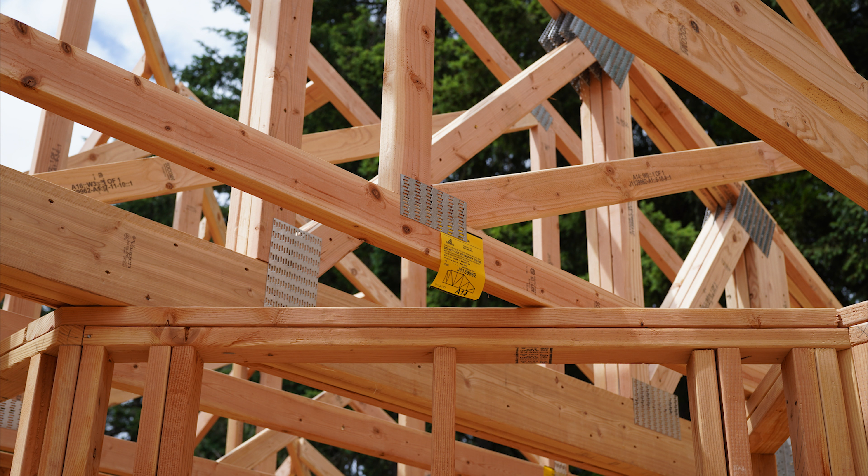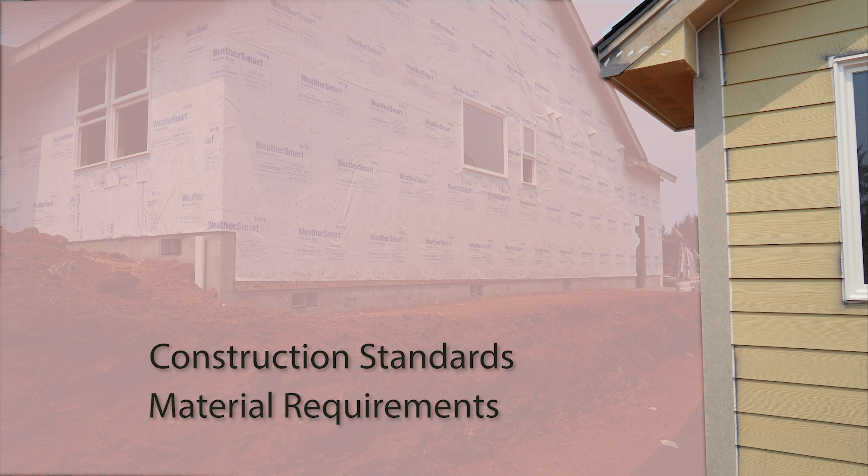This training has been prepared for residential contractors licensed by Oregon's Construction Contractors Board. This training video covers construction standards and material compliance requirements from the latest iteration of the Oregon Residential Specialty Code, the 2023 ORSC, regarding wildfire hazard mitigation or home hardening.

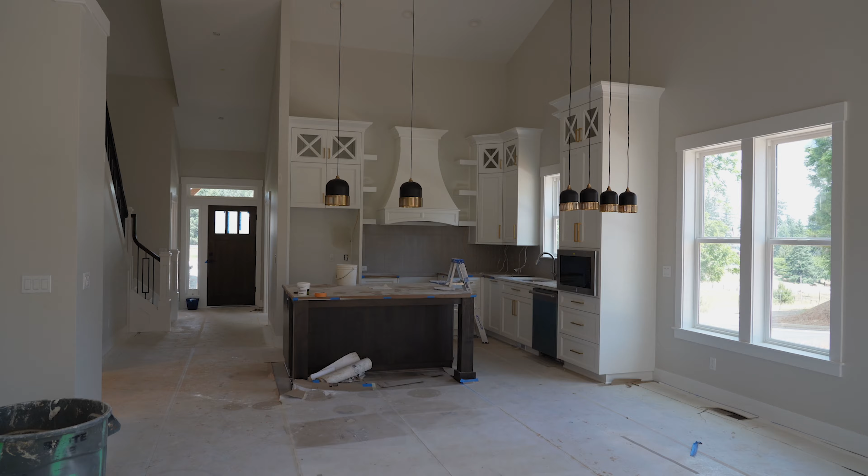The objective for this training is to identify the appropriate construction standards required in areas of our state where the wildfire hazard mitigation provisions of the 2023 ORSC are applicable.

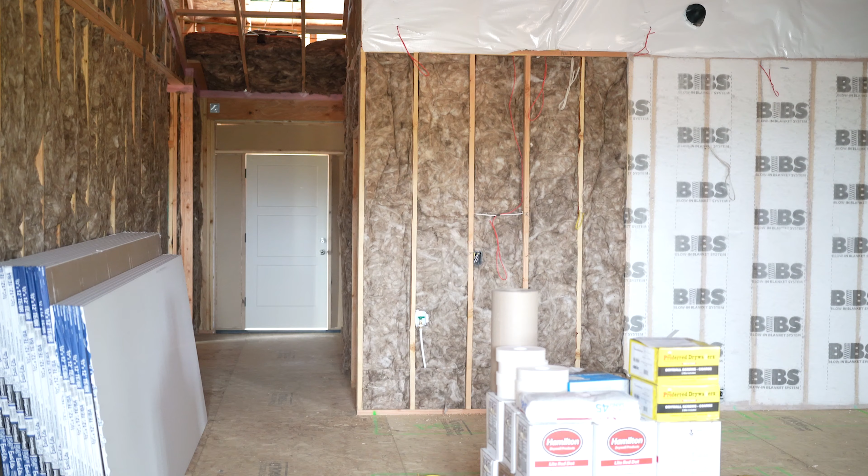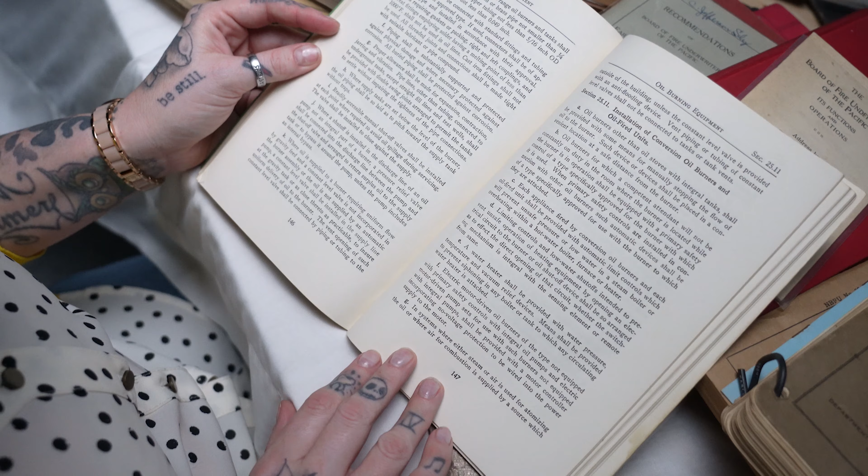Tony Rocco has worked in the industry for over 20 years and has been the structural program chief since 2017. Tony has a personal library of national and state codes dating back to the early 1900s, and believes that the original history and true genesis of modern code provisions is critical to the improvement of Oregon specialty codes for local government partners, customers, and all stakeholders. He is a great resource for questions about ORSC and OSSC matters.

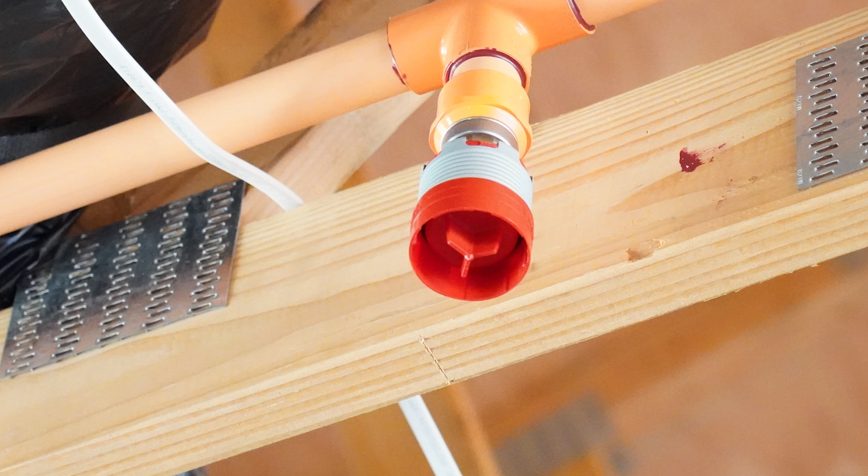Eric McMullen has a wealth of code experience from an extensive 27-year fire service career. He started working with fire and building codes in the early 1990s at the Oregon Office of State Fire Marshal. Eric is a great resource for all things fire life safety and is our resident fire systems expert.

Section R327 of the Residential Code has been around for 20 years. In 2019, it was expanded to include a much broader range of wildfire hazard mitigation standards. These provisions are often referred to as home hardening or fire hardening and are intended to help prevent ignition of a home during a wildfire event, most often via airborne embers.

These provisions apply generally to all dwellings and their accessory buildings in areas where a local municipality has implemented the provisions via local ordinance.

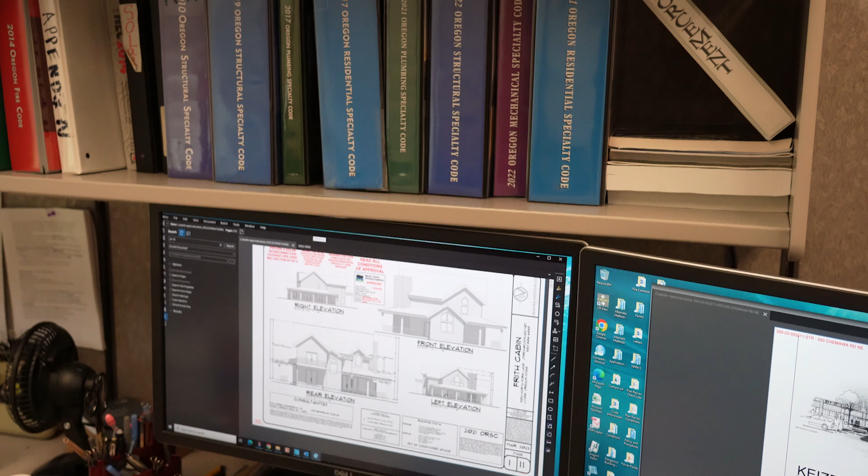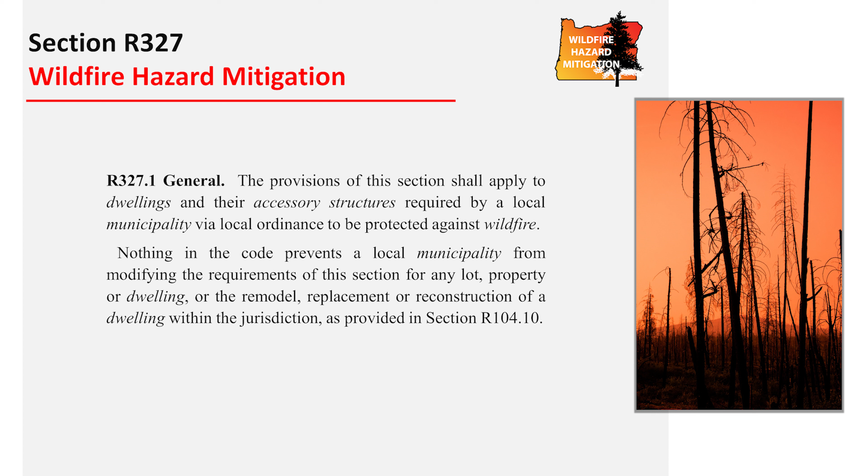Currently, the standards are available for all municipalities in the state to adopt and only apply to those areas within the county or city that are detailed in the adopting ordinance and identified on the locally required map. Local building officials, of course, retain the flexibility to modify the requirements for any particular lot, property, or dwelling, remodel, or reconstruction activity based on the site details.

As we covered on the previous slide, Section R327 is available for any municipality to voluntarily adopt, without going through the local amendment process detailed by statute and rule. Where adopted locally, the ordinance must outline the areas where the provisions apply, a local plan to address any subdivisions already under construction, and a local appeal mechanism for customers to challenge the additional requirements.

Some municipalities already have existing ordinances in place adopting these standards. After the expansion of the section in 2019, the cities of Medford and Ashland adopted the section. Other municipalities, such as Deschutes County, have long standing partial ordinances requiring compliant roof coverings and prohibiting wood shingles or shakes.

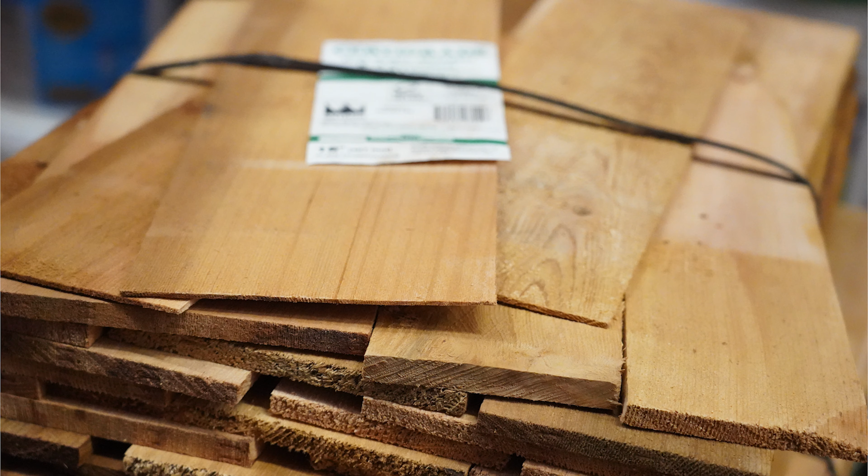All existing ordinances are recognized and permitted to continue without change as determined legally sufficient by the municipality.

To determine if the standards apply in the area where you are working, we recommend you contact the local building department experts directly. On a very important side note, our Oregon legislature has established a comprehensive statewide policy regarding future application of these wildfire mitigation construction standards. While currently Section R327 is an optional set of requirements for local governments to consider implementing, along with establishing a local wildfire hazard zone map, in the near future, a statewide wildfire risk map will be implemented by the Department of Forestry with extensive support from Oregon State University.

Once that statewide map is effective, through the Oregon Explorer online mapping database, it will supersede all locally adopted maps and will identify all areas of the state where these construction standards of Section R327 will apply outright. At that time, these provisions will no longer be optional for local government, but will become automatically applicable to all areas identified on the map as elevated wildfire hazard zones.

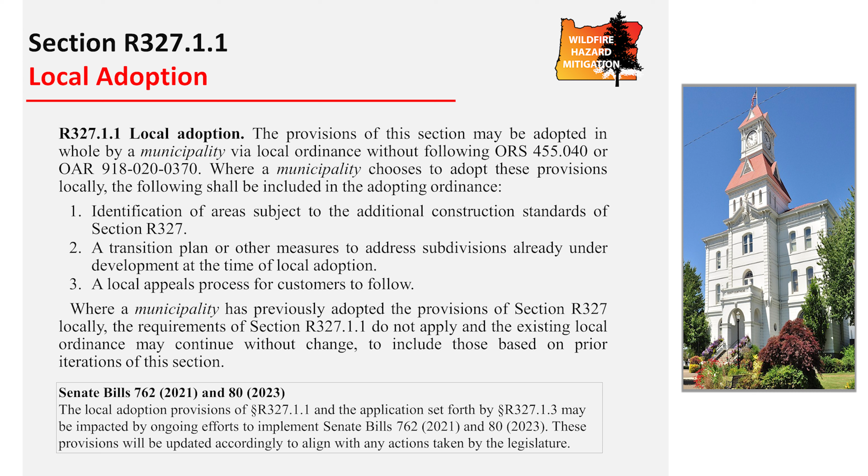Until then, these provisions remain optional for local government. When the forthcoming statewide policy is implemented, interim amendments to the residential code will be adopted through our public rulemaking and public advisory board meeting processes. If you're signed up for division notifications, you will receive ample notification of these meetings.

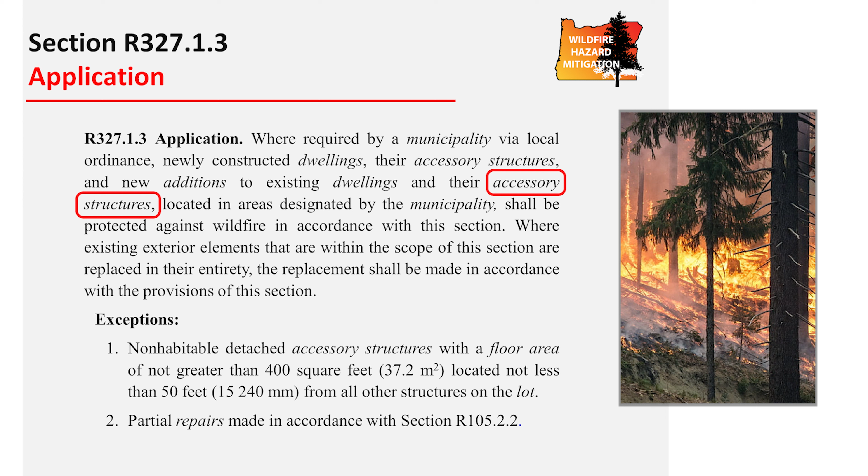Where adopted locally, all of the following require compliance with the provisions of the section unless specifically exempted elsewhere by the section: new dwellings, new accessory buildings like detached garages, sheds, and shops, new additions to existing dwellings that increase the overall area of the dwelling, new additions to existing accessory structures where applicable, and full replacement of existing exterior elements covered by the section.

This only applies where that element is replaced in its entirety. For example, if the existing dwelling is entirely re-roofed, the new roof covering would be required to meet the standards of this section. However, if an existing roof is simply patched or repaired, which only impacts a segment of the existing roof covering, the standards would not apply.

Additionally, non-habitable accessory structures are exempt where they are detached, not greater than 400 square feet in usable floor area, and a minimum of 50 feet away from any other structure on the lot. Where the accessory structure is less than 50 feet from any other structure on the lot, it must comply with the standards regardless of the size or area.

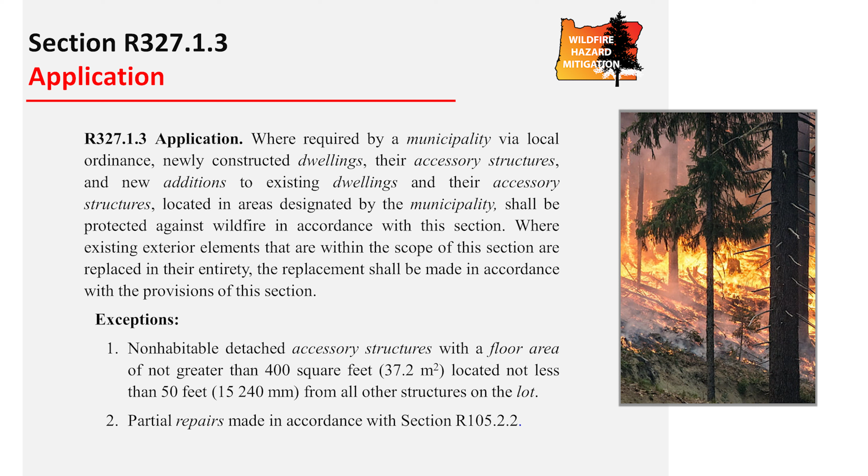Later in the presentation, Eric will cover each of the exterior elements in more detail to help identify options for compliance.

As we covered on the last slide, the hazard mitigation standards apply to the full replacement of exterior elements which are covered by Section R327. This overlaps with existing permit exemptions identified in Chapter 1, Section R105.2. Some exterior elements, such as windows which are required to be fire resistance rated, and roof coverings of re-roofing activities located in areas designated by the municipality as wildfire hazard zones, do require appropriate building permits through the local building department.

However, other items such as small accessory structures like tool sheds, garages, or carports, and activities such as re-siding of an existing dwelling remain exempt from building permits even in the areas where Section R327 has been voluntarily adopted.

The overarching guidance of Chapter 1 permit exemptions is that the allowances to be exempt from a local building permit do not allow any work to be conducted without meeting the applicable code standards for the items being exempted. More plainly, even if the activity is exempt, the code still requires that the work conducted meet the applicable provisions, and in this case, that the exempt item still complies with the wildfire hazard mitigation construction standards.

We're now moving into the technical provisions of the section. We'll start out by covering several definitions for additional context regarding the code's expectation of compliant materials. Further along in the presentation, Eric will provide all the details you will need regarding the technical application of these definitions. The first definition we have is heavy timber.

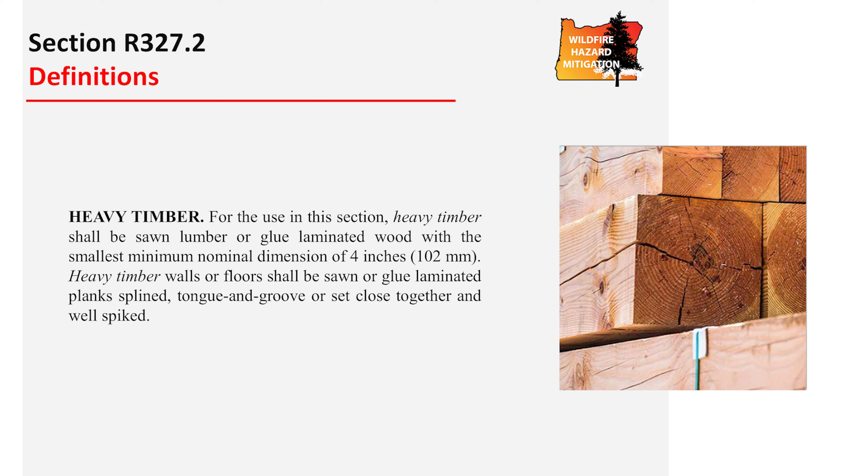Code uses this term to describe materials which are either solid sawn or glulam wood, and of not less than 4 inches nominal in any dimension. When considering standard lumber packages, this means we must minimally have a 4x4 member to constitute heavy timber. Keep this in mind, particularly for porch cover construction, other projections, walking surfaces such as decks, and for any location where the term is used in the section.

Next, we have ignition-resistant material. This very technical definition describes building materials which resist ignition or sustained flame exposure to a level needed to reduce assumed loss or damage from wildfires under the worst-case conditions and assumed exposure to burning embers and small flames.

To comply as ignition resistant, the exterior building material must be tested in accordance with ASTM E84 or UL 723 and demonstrate the following characteristics: a flame spread index of 25 or less when exposed to the 30-minute test, and show no evidence of significant combustion by limiting the flame front of the test flame to not more than 10.5 feet beyond the center line of the burner at any time during the 30 minutes.

So how do you know if a material is ignition resistant? Look at the cut sheets. The manufacturers of these materials want to advertise their durability and properties as well as testing results. Using the manufacturer's technical data sheets is the best way to quickly identify material compliance or non-compliance. If you have a question about a particular product, we recommend contacting the manufacturer directly before purchasing the product.

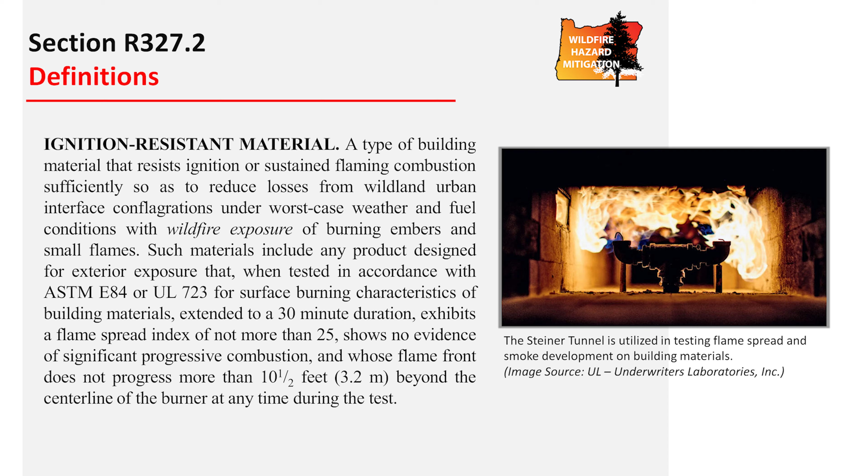For our last technical definition, we have the highest level of wildfire-resistant building materials: non-combustible materials. This gold standard material property is reserved for building materials in their actual installation form, which will not ignite, burn, support flame propagation or combustion, and will not release flammable vapors when subjected to fire or heat. The applicable testing standard in this case is ASTM E136, and the testing protocol includes exposing the material to heat and flame upwards of 1382 degrees Fahrenheit for not less than 30 minutes.

So what non-combustible materials come to mind when you hear the term and review the definition here?

Commonly, hard metals like steel and masonry, including both CMU or concrete masonry units and traditional clay brick, are qualified. Other materials include concrete, certain glass, and even some synthetic proprietary composites. When in doubt about the material testing, qualifications, properties, and related details, we recommend relying on manufacturer data and standardized material details for things like steel members and masonry piecework.

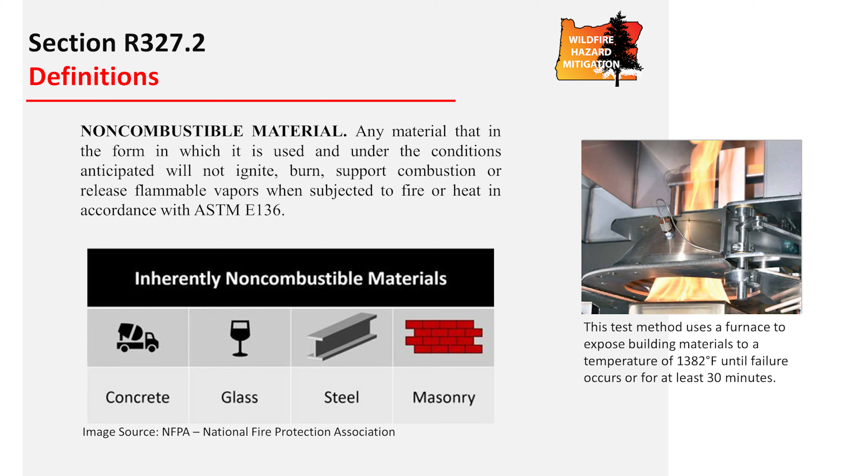Now that we have gone through the administrative foundation of the wildfire hazard mitigation provisions of Section R327, and reviewed a few critical technical definitions, it's time to dig into the technical installation requirements along with senior building code specialist and vastly experienced fire service representative, Eric McMullen. Take it away, Eric.

Now that Tony's walked you through the scoping, provisions, and definitions, we'll move on to the material specific requirements. The first requirement is roofing in R327.3. The minimum requirement for roofing is a Class B roof assembly. There's quite a few different materials that can get you there: tile, clay, concrete, metal. Most architectural asphalt shingles will give you a Class B rating. The key is you just want to check with the manufacturer and make sure that the appropriate rating applies to the material you're installing. Wood shingles and shake roofs are not permitted at all, even if they're fire retardant treated.

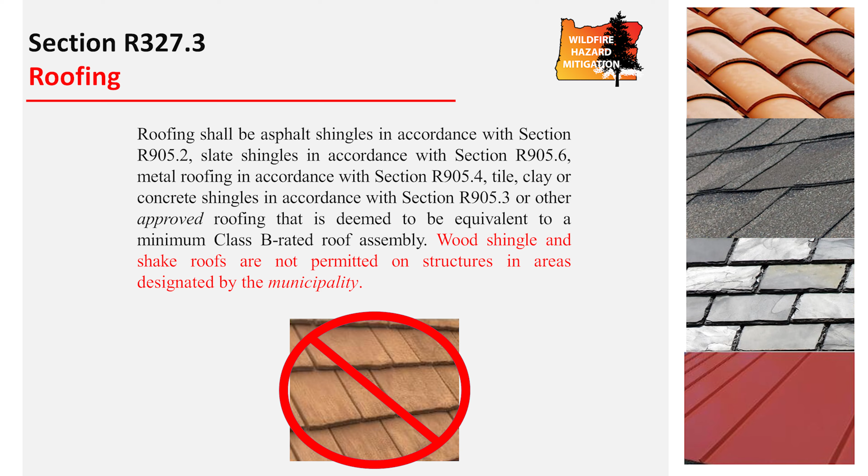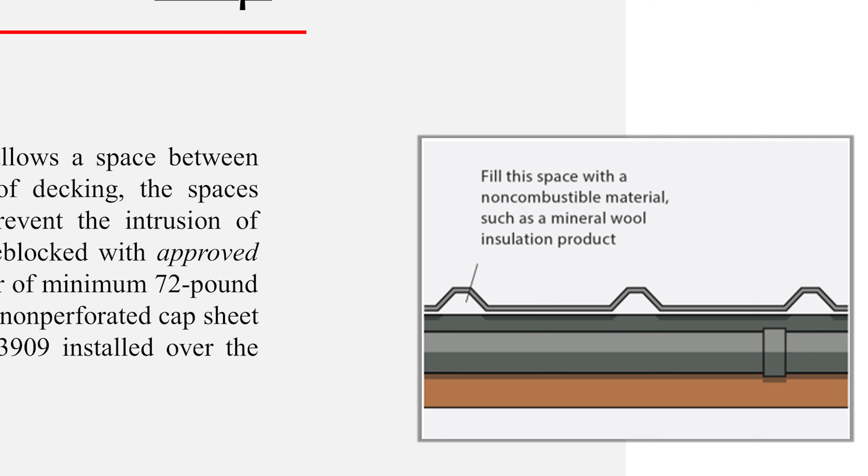And for metal and tile, there's one other thing we need to address. When it comes to metal or clay tile roofs that leave gaps like you see in this illustration, the requirement is to mitigate those gaps with one of three options. The first option is that the material is constructed such that it prevents the intrusion of flame and embers. The second option is to fill those voids with an approved fire blocking material.

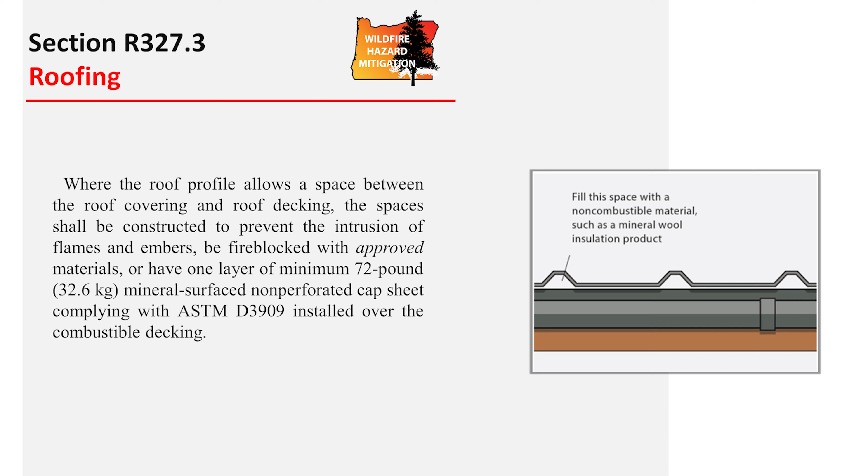Note that approved is italicized, so that means it's defined. The approved fire blocking materials can be found in this code in section R302.11.1. The last option is to put down a layer of 72-pound mineral surfaced non-perforated cap sheet under the roofing material on top of the roof deck.

When it comes to valleys, if valley flashing is installed, then some additional treatment is required. For laced valleys with asphalt shingles, of course, this wouldn't apply. But when valley flashing is installed, it has to be a minimum of 26 gauge corrosion resistant galvanized metal, and that metal has to be laid over a minimum 72-pound mineral surfaced non-perforated cap sheet, not less than 36 inches wide all the way from the bottom to the top of the valley.

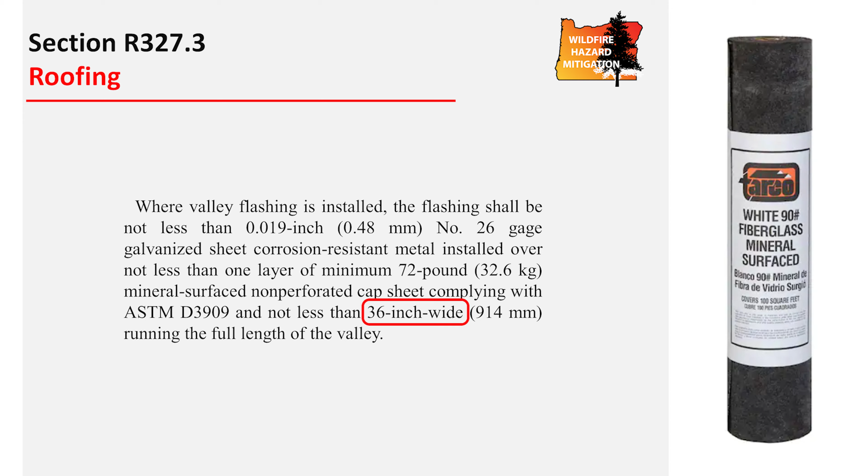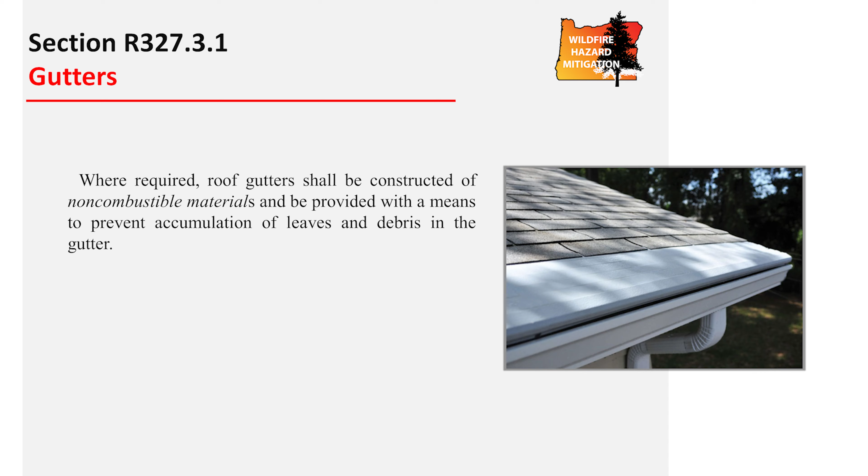The final topic under the roofing category is gutters. Gutters aren't always required in every jurisdiction, but where they are required, they will need to be non-combustible materials, and they'll need to be provided with a means to prevent accumulation of leaves and debris in the gutter. The code is not specific about the type of method for preventing the leaves and debris, but that methodology would also have to be non-combustible.

The next subject matter in section R327.3.2 is ventilation. The ventilation provisions cover all types of ventilation on a house, so roof ventilation, gable-end ventilation, and even crawl space ventilation, any of those vents. There are three options for how to deal with those vents, the first of which is to cover them with a non-combustible, corrosion-resistant wire mesh. That wire mesh has to be a minimum of 1/16 inch and a maximum of 1/8 inch in any dimension.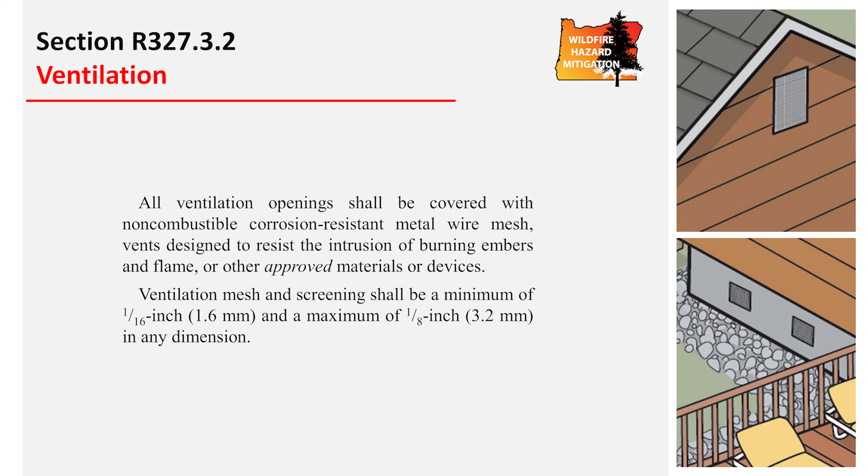The other option is to provide vents that are designed to resist intrusion of burning embers and flame, and these are special vents. We'll talk a little bit more about those on the next slide. And the last option is some other approved material or device. You'll note that approved is italicized, and again, just a reminder that means that term is defined. The definition of approved is as approved by the building official, so that would mean some other material or device that the building official deems equivalent.

Still under the subject of ventilation, now we get to the topic of ventilation specific to eaves, soffits, and cornices. In the previous slide, we gave you three options for how to deal with vents, generally crawl spaces, gable ends, roofs. This is specific to just eaves, soffits, and cornices. The base requirement is that there are no ventilation openings allowed in these areas, with a couple of exceptions.

The first exception is vents that are designed to resist the intrusion of flame and burning embers. There's a couple examples on the right here, made by Vulcan. The top is a soffit vent and the bottom is a foundation type vent. So these are examples of the vents that would fit that exception.

The second exception is that you can use any of the methods on the previous slide, so non-combustible mesh vents like on the right, or other approved method by the building official, as long as the eave, soffit, or cornice is at least 12 feet or greater above grade. So this would apply for most second story applications.

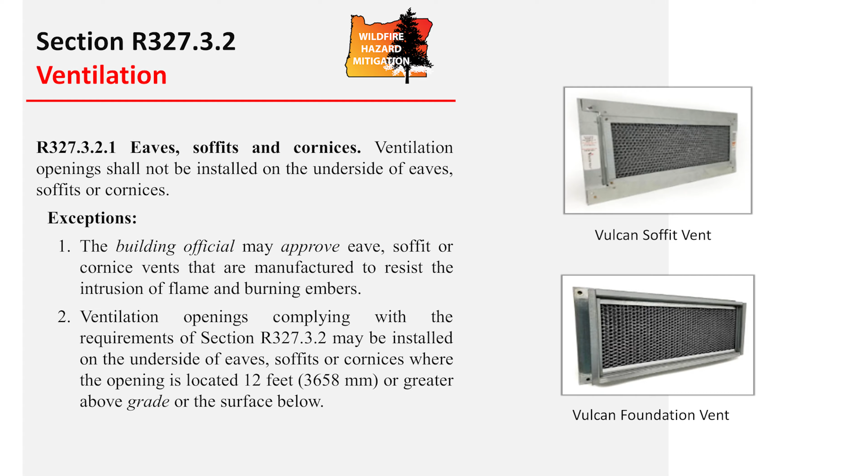The next subject matter we come to is exterior walls in section R327.3.3. The first part of this provision lays out the 5 different options for exterior wall coverings or wall assemblies. Those are different in terms of exterior wall covering just literally being the covering on the outside of the wall, and the assembly being the entirety of the wall. So you see the 5 items here, and you're going to see these items repeated as we go forward on a lot of the other different materials.

These are the items that Tony went over under the definitions section. Your requirement for exterior walls are non-combustible material, so that's things like metal, fiber cement siding complies, which is pretty common. Ignition resistant materials, and those are those that undergo the test that Tony would have talked about under the definitions. Heavy timber, again defined, and log wall construction or assembly, and that's kind of self-evident. And then the last one is kind of a catch-all, a condition of acceptance, and we're going to cover that in more detail in a little bit, but that's an actual testing of an assembly. So somebody puts together an assembly and has it tested specifically, and if it passes, then it would be approved.

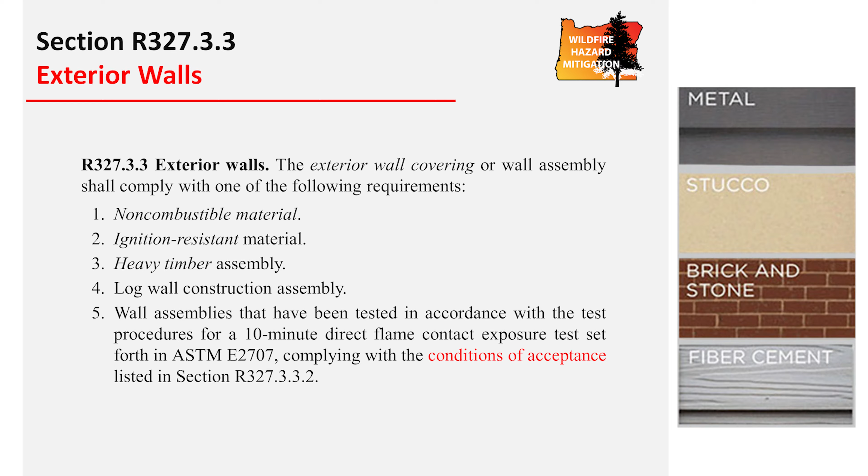Still under the subject of exterior walls, we have a couple of exceptions to the previous provisions we just discussed. Under these exceptions, there's 2 options that are considered deemed to comply. The first option is placing 1 layer of 5/8 inch Type X exterior gypsum sheathing behind the wall covering. So you could do a wood T111 and put the 5/8 Type X gyp behind it, and that would work. The other option is the exterior portion of a 1-hour fire resistant rated exterior wall.

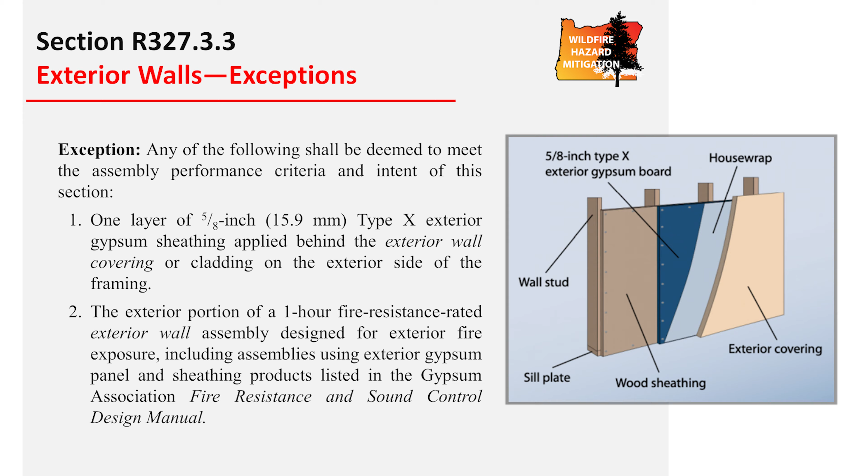Rated exterior walls are probably more common in commercial applications, or when you get too close to a property line in a residential application. So you can do the exterior side of that assembly from the fire resistance and sound control design manual, or the gyp manual.

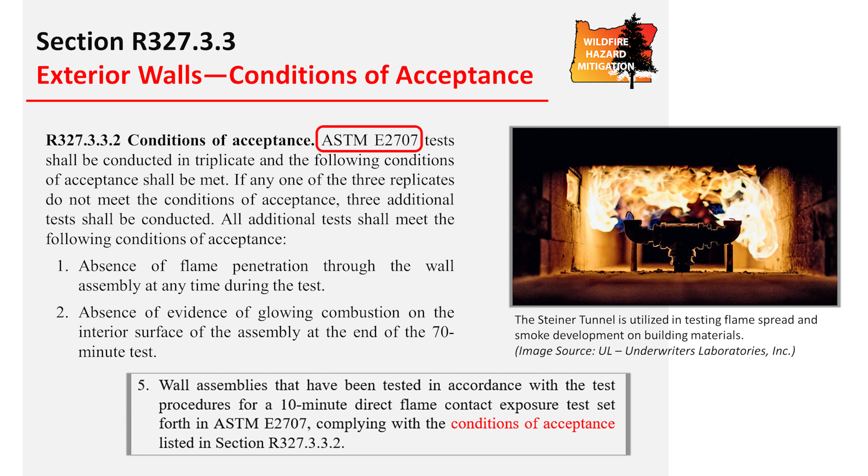Still under exterior walls, we get to the conditions of acceptance. So when we were talking about exterior walls and looking at the 5 options, remember option number 5 was a specific wall assembly that's tested. The language in R327.3.3.2 tells you what that conditions of acceptance has to look like. It's an ASTM E2707 test to prove that the assembly is equivalent.

Finally, under the subject of exterior walls, we discuss the extent of the exterior wall covering and trim. For exterior wall covering, it's got to go from the top of the foundation up to the bottom of the roof, and it has to terminate at 2-inch nominal solid wood blocking, so up to the bird block or to the bottom of an enclosed soffit eave.

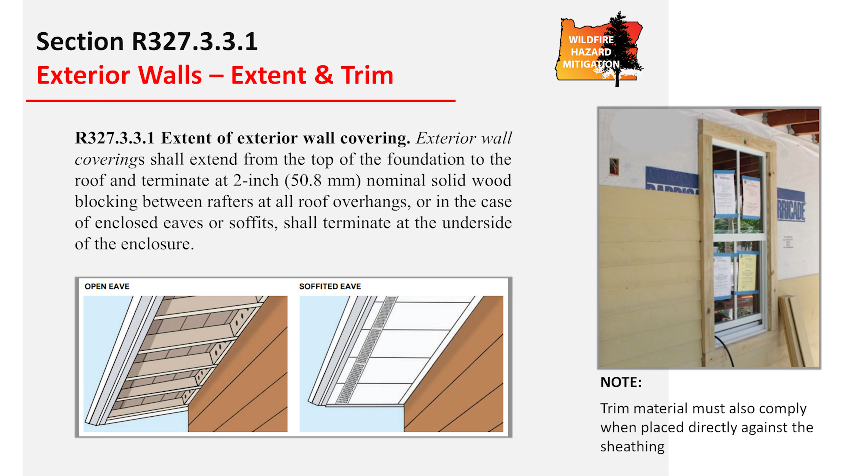The other issue that comes up quite often is trim. When you're installing trim, like the illustration on the right, like fiber cement siding, the trim either has to be also fiber cement siding if it's up against the sheathing, like shown here, or that trim could be wood trim, but it would have to be on top of the fiber cement siding. So that exterior cover that meets the requirement has to be against the sheathing.

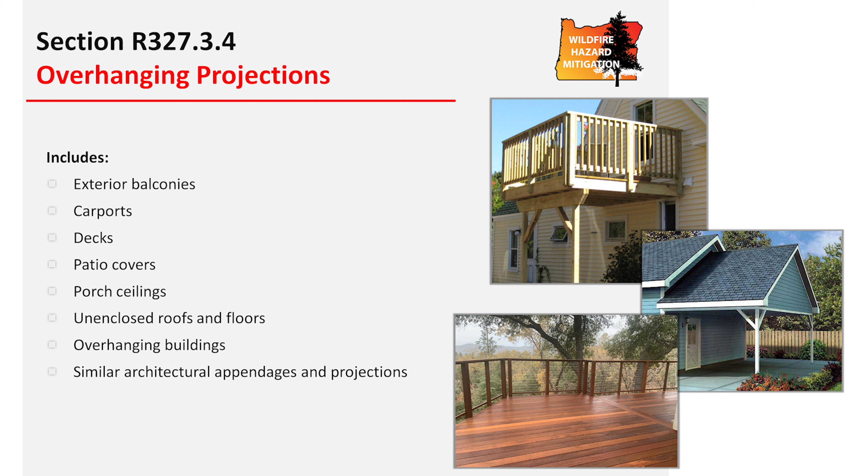On to the next subject matter. In section R327.3.4, we come to overhanging projections. Overhanging projections is a broad term that encompasses the list that you see below: exterior balconies, carports, decks, patio covers, porch ceilings, unenclosed roofs and floors, and overhanging buildings, and similar type projections. We'll break these down as we move forward through the next slides.

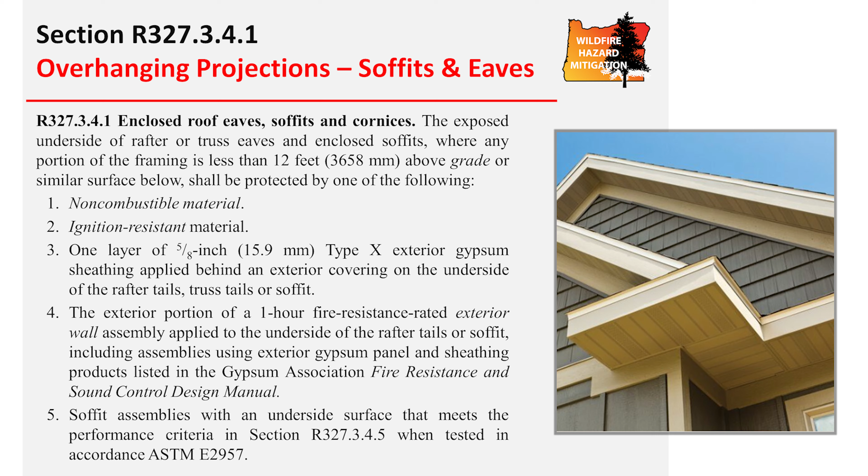Still under the subject of soffits and eaves, there are three different exceptions to not require protection. The first is if all framing members are 12 feet or greater above grade and 2-inch nominal eave fire blocking is provided between the roof framing members, installed from the top plate to the underside of the roof sheathing.

The second option is gable end overhangs, like shown in this illustration. The roof assembly projections beyond the exterior wall are not required to be protected. The picture shows them enclosed, except for the area at the lower end of the rafter tails. The last exception is for fascia and other architectural trim boards, which are always excepted from this requirement.

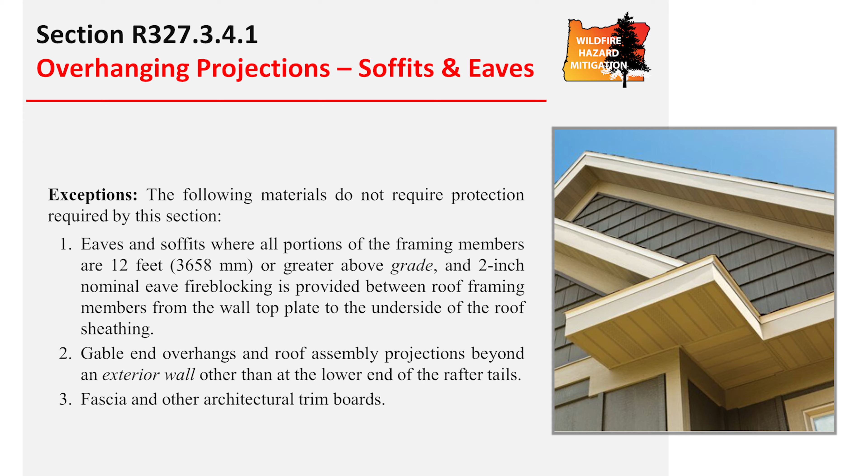Still under overhanging projections, we come to patio and porch ceilings. The underside of these structures, as long as they're greater than 200 square feet in area and less than 12 feet above grade, shall be protected. So smaller than 200 square feet or over 12 feet high, the underside doesn't need to be protected. Otherwise, the bottom of that exposed porch or patio could be a roof over a deck.

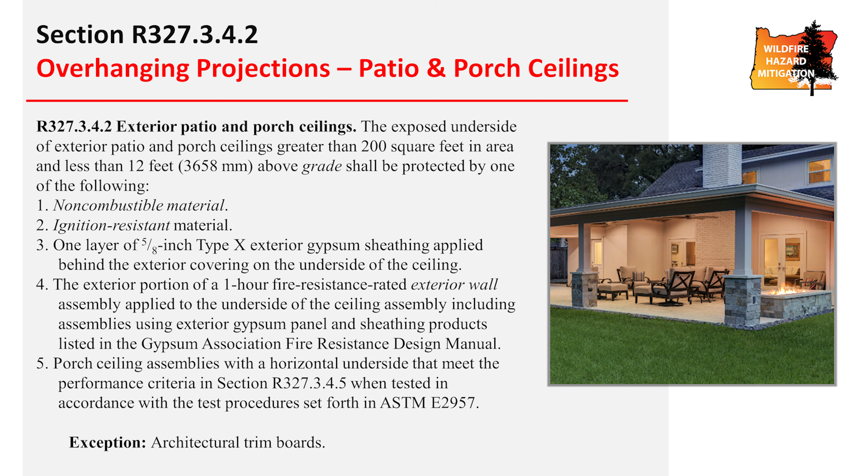We see the same 5 options as we first saw under exterior walls, and of course architectural trim boards are excepted.

We are up to section R327.3.4.3, still under overhanging projections, and this section covers floor projections. So cantilevered floors, like the illustration shown, the underside would need to be protected if less than 12 feet above grade. Again, same list and same exception for architectural trim boards for these floor projections.

Section R327.3.4.4, underfloor protection. This is still under overhanging projections, and this provision is intended to encompass houses that are completely elevated, so that vulnerable underfloor space would have to be protected by one of that same 5 list. There is an exception for heavy timber structural columns and beams in those areas, and if you recall from the definitions, heavy timber was a minimum of 4-inch dimension.

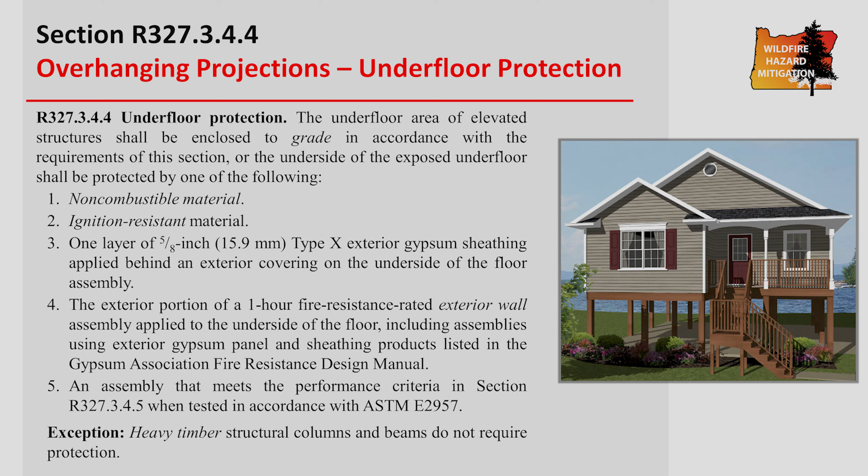Finally, under overhanging projections, we come to the conditions of acceptance, which again is similar to the exterior wall provisions we discussed earlier. This applies to that 5th option under the sections listed there in the bottom box.

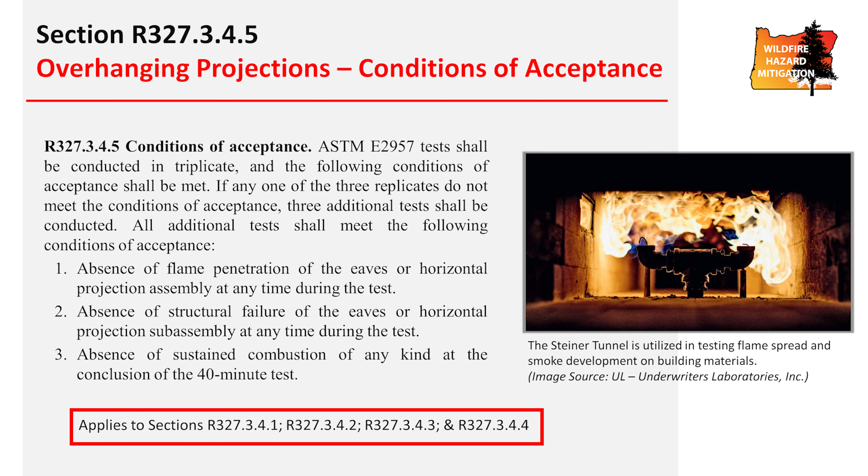The next subject matter is walking surfaces in section R327.3.5. These provisions cover areas like decks, porches, and balconies, and would cover not just the decking but the substructure supporting the walking surface as well. The scope covers decks, porches, and balconies greater than 30 inches in height, so under 30 inches are exempt, and less than 12 feet above grade, so if they're on a tall second or third story at 12 feet, it wouldn't apply either.

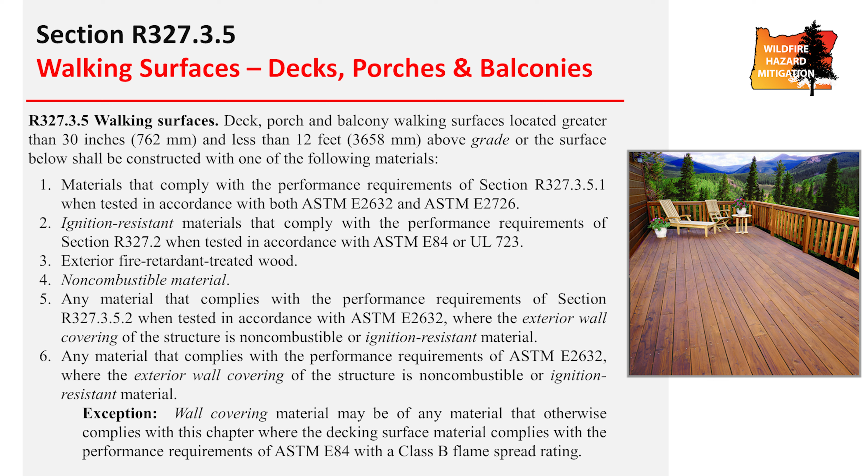Material options are listed below. Again you can see they are fairly similar to the previous, although there are 6 now, with one added performance criteria, and also the ability for exterior fire retardant treated wood.

There is an exception to the walking surface criteria for decks, porches, or balconies that are not greater than 200 square feet. In those cases, the actual decking surface itself can be any type of material as long as it's 2-inch nominal.

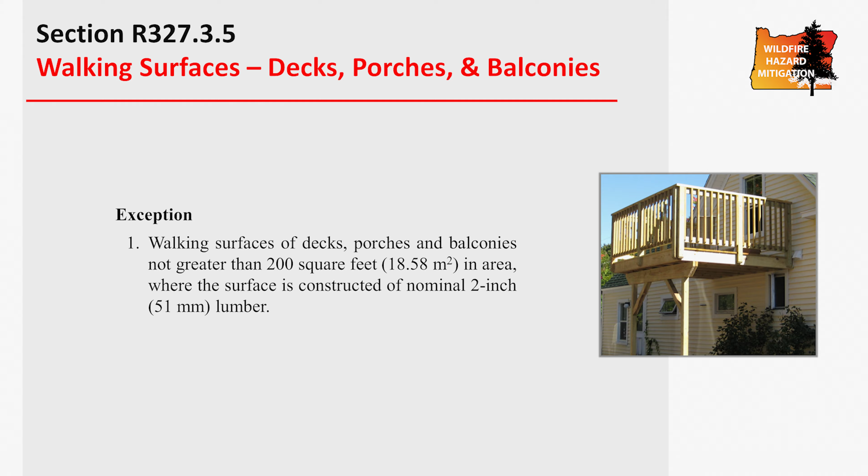Finally, for walking surfaces, we have those conditions of acceptance, and you'll recall there were 6 different items under the options for walking surfaces. There are a bunch of different tests related to those that can meet that criteria. Under item 1, there are 2 separate tests listed, and item 6 is covered by section R327.3.5.2. So different options to get there for decking.

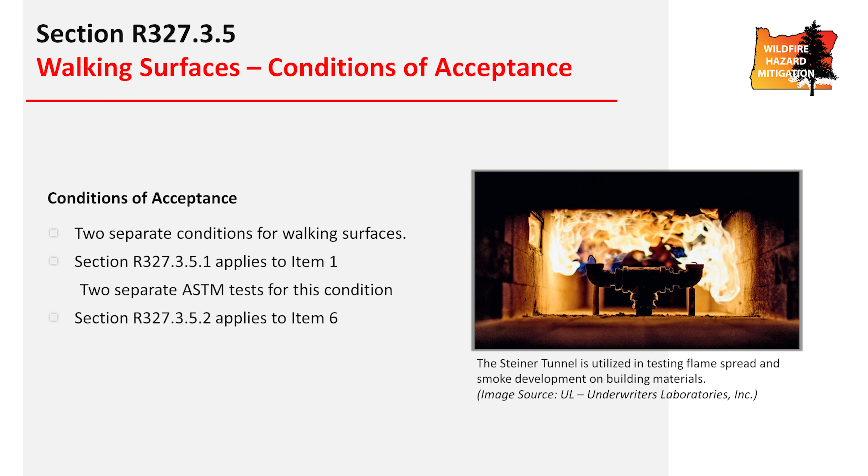But for the most part, unless it's a small deck, it's not going to be your typical lumber. I am aware that there are some synthetic decking materials out there that do meet some of these testing requirements. You just want to make sure they do before applying them.

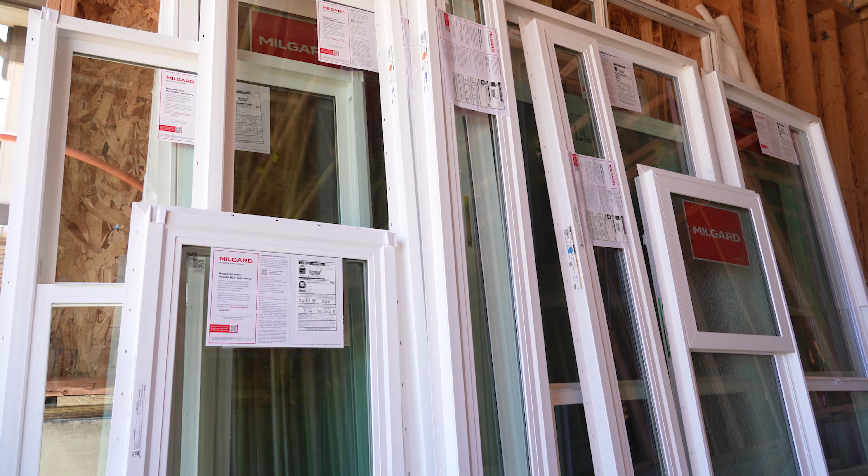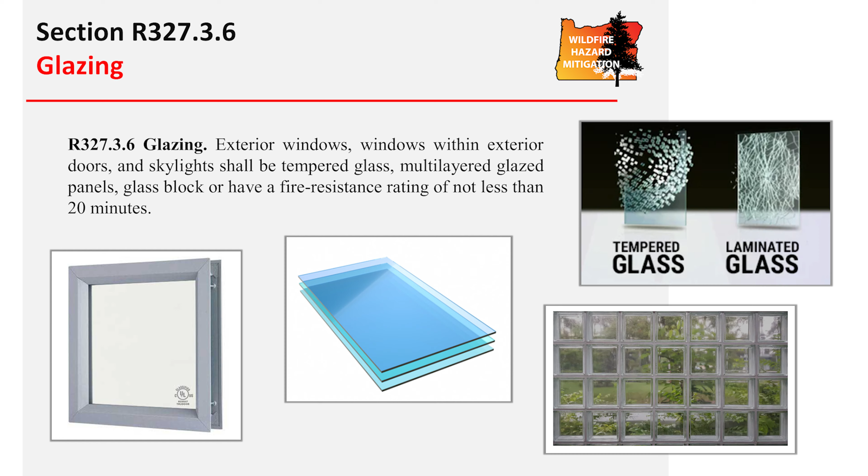The final topic under material specific provisions is glazing, section R327.3.6. These requirements apply to windows, windows within exterior doors, and also skylights. So the requirements are either tempered glass, multi-layered glazed panels, glass block, or a 20-minute rated assembly, which is a frame and rated glass. In most cases, the multi-layered glazed panel condition means that most just standard double pane windows would meet this requirement, so nothing extra special that you have to do for this one.